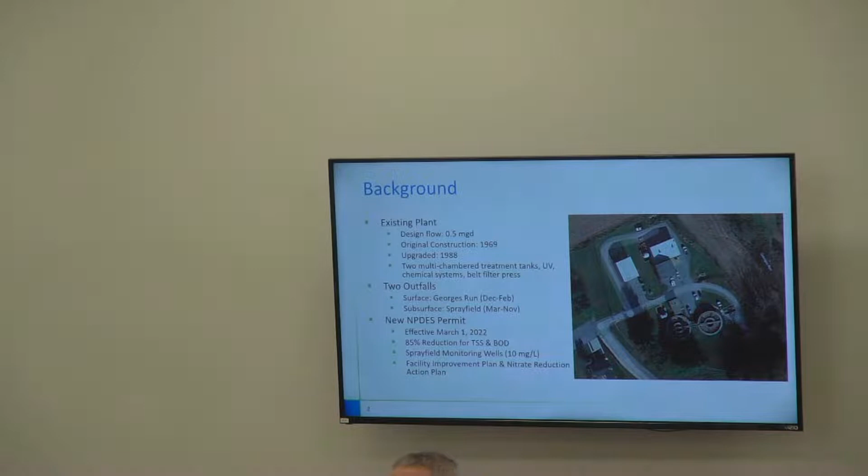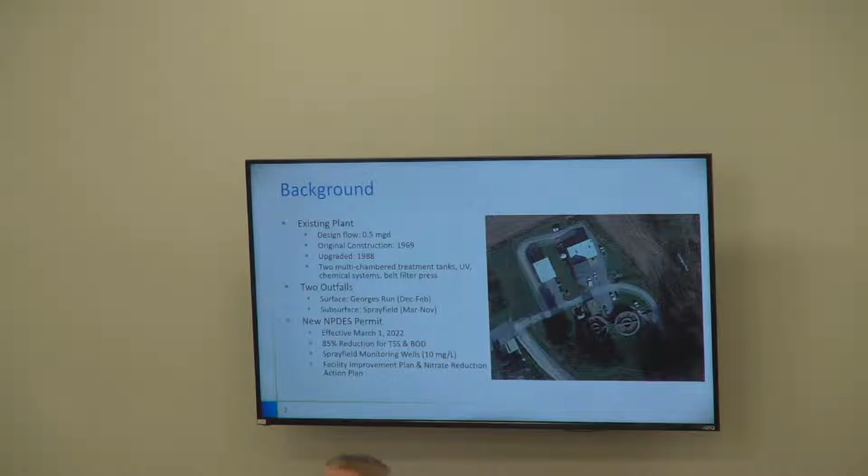As the mayor alluded to, there's two outfalls. There's the surface water discharge in the winter to George's Run, which is adjacent to the plant, and then the rest of the year you have your subsurface discharge with the spray field, from March to November generally. That adds an interesting wrinkle into this evaluation. Those dual discharges are a unique feature of the plant here, and it gives you some flexibility that we had to take into account.

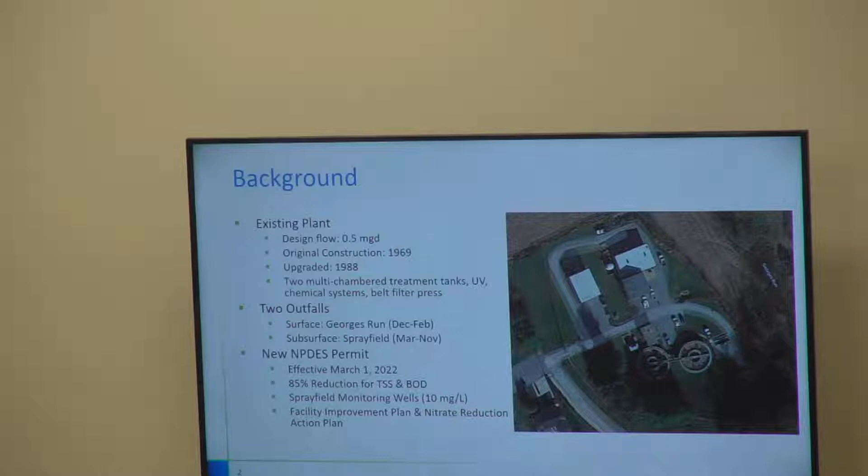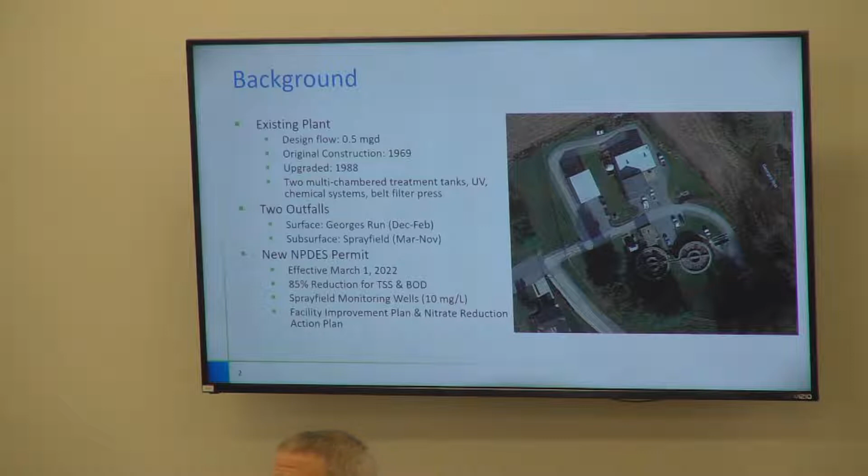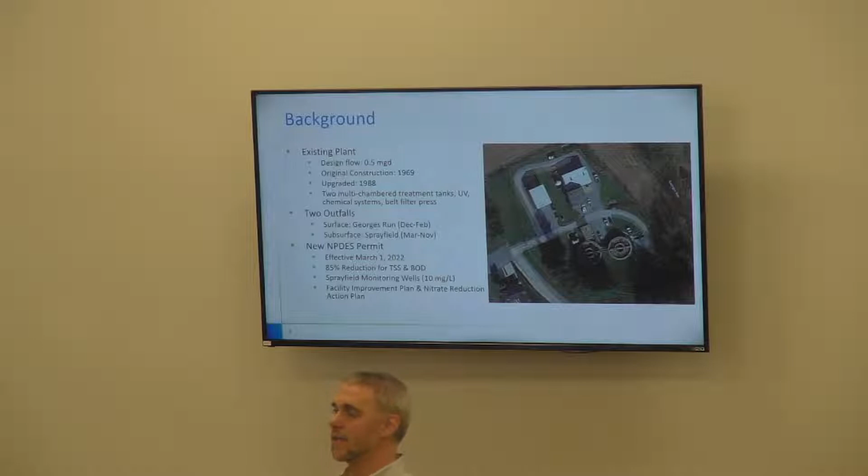There recently has been a new NPDES - that's the National Pollutant Discharge Elimination System - permit. It's an EPA permit that's also issued through MDE, and the new permit was effective March 1st. Not a whole lot changed. One thing that was interesting that's across the board, all of the new NPDES permits have an 85% reduction rate that they're implementing for total suspended solids, that's TSS, and biological oxygen demand. So really for a typical waste, that doesn't really lower the limit - it's just now you kind of can't take credit for having a weaker strength coming in. You still have to meet the 85%.

It still has the 10 milligram per liter nitrate requirement on the spray field, for downstream monitoring wells to make sure that there's not too much nitrates going into the groundwater from the spray field system. Two additions in that permit: one is a facilities improvement plan that's required, and that essentially comes out of some plant upsets that happened over the previous permit limit. The state is just looking for a plan on how the town plans to address those. And then there's also the nitrate reduction action plan, related to the spray field site and those downstream wells. They've found that some wells are increasing in nitrate level and they want the town to develop a plan to implement in the event they continue to increase, and how you're going to handle that. So those are the highlights of that new permit.

The study that we were hired by the town to do was funded through the state's Bay Restoration Fund. It included a condition assessment of what's at the plant now.

So we worked with your team and went through the whole plant to figure out how much life is left, what parts or equipment is failing or near the end of its life, what needs to be upgraded. It also included an expansion evaluation that I'll touch on a little bit. The bulk of it was the alternatives evaluation, and as part of that, we looked at 4 different alternatives, and I'll get into those details.

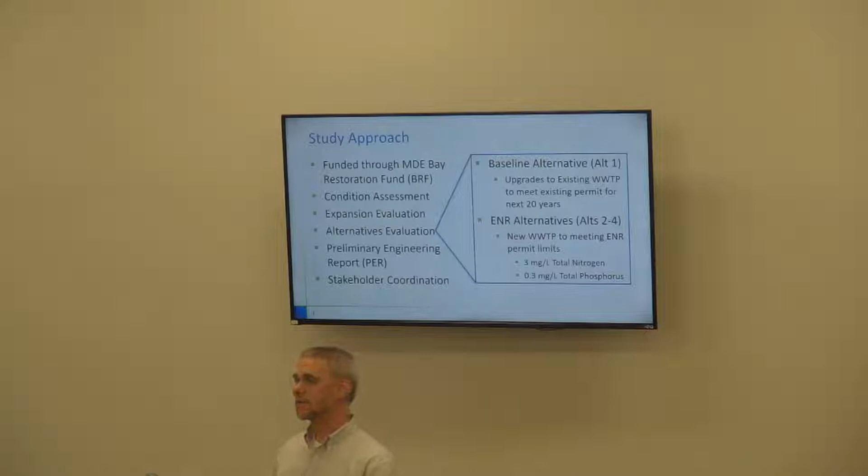So it's, again, a proactive approach by the town, to be commended for seeing that grant opportunity to study your plant and see what's best for the town's long-term needs.

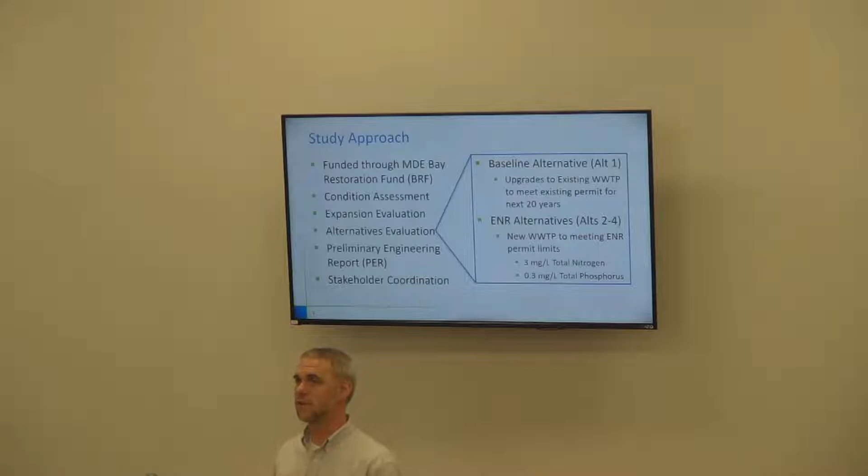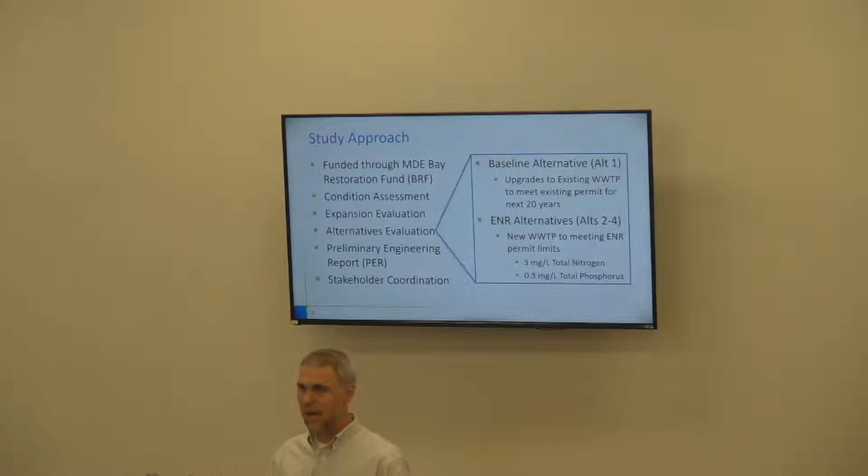All that was summarized in a preliminary engineering report that Rodney mentioned. It was submitted to MDE in draft a few months ago, as well as to the town. We got comments back, we revised it, and it was issued again in March. So we're waiting at this point for that feedback from the state. I checked in with their engineer earlier today, and he's still in the middle of his review. Throughout that whole time, we worked with the state, the Department of Public Works, the operators, and finance, Steve, to get all their input to make the right decisions.

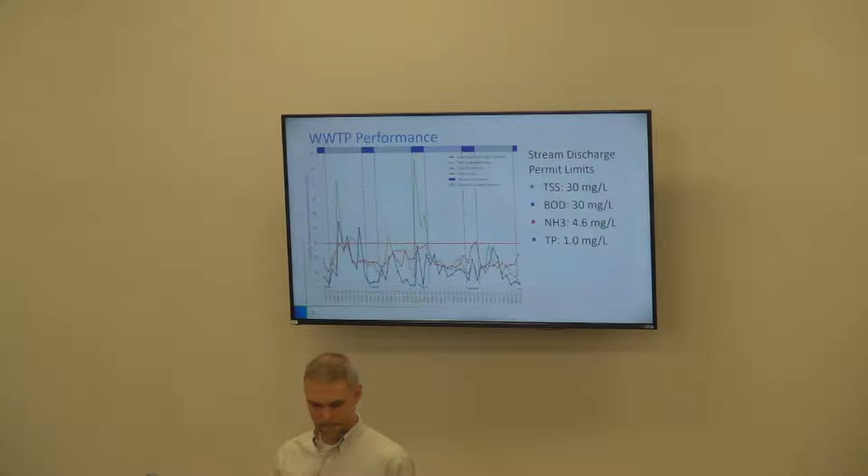Real quick here, the plant upsets that I referred to - this is key effluent data from the plant over the last 3 or 4 years. Those narrow bands you see between the blue dotted vertical lines are the periods when you're in a stream discharge, and that's when you have to meet a higher level of treatment. Where you see those green lines spike up, those are the plant upsets that are especially problematic in the stream discharge period, when requirements are stringent and you don't have that spray field to smooth it all out.

So that's what dictated the facility improvement plan requirement.

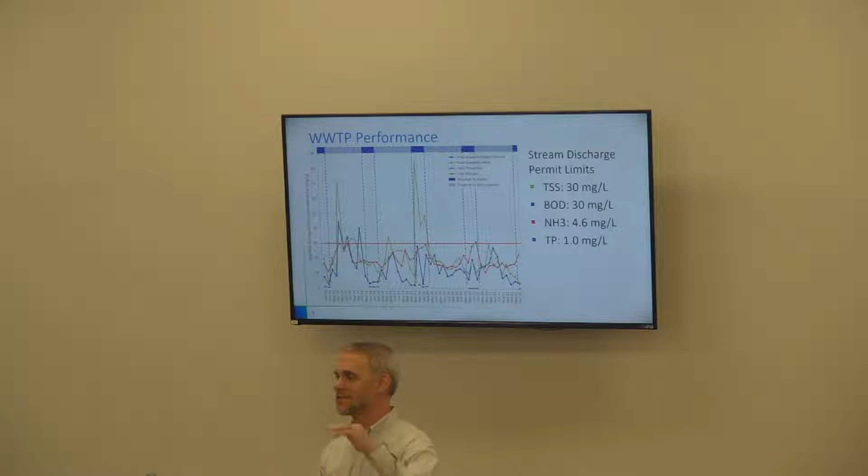And I guess I should have said this earlier, but if anybody has any questions as we're going along, please interrupt me. Otherwise, we can ask questions at the end, either way.

Real quick on the condition assessment - don't want to get into a whole lot of detail, but these were some of the major findings of improvements that would be necessary for the plant to continue to meet permit, even if you weren't going to go ahead with that ENR, enhanced nutrient removal upgrade.

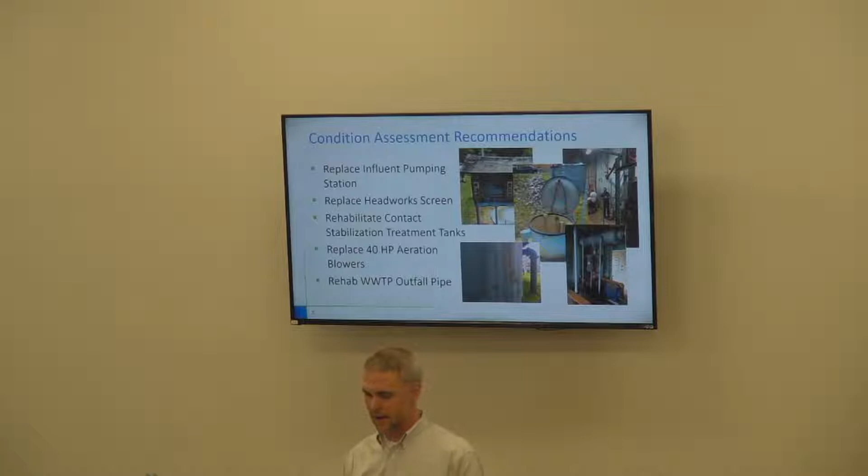So we found that the influent pumping station was in need of replacement. This is a portion where the pumps are located down in there. Here are the controls back here, pretty antiquated, in need of replacement.

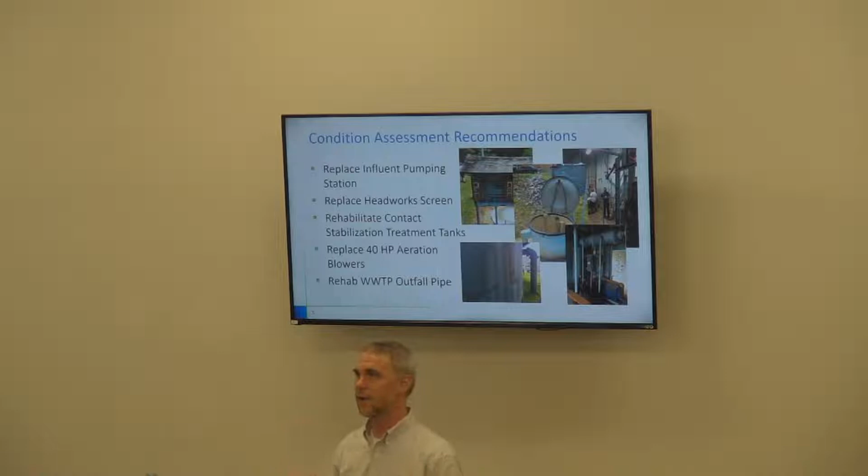The headworks - this is a picture from down in the lower level of the headworks where the screen is. There's some confined space entry concerns. The screen is down there, and it has to be hauled out manually. So we recommended some improvements there.

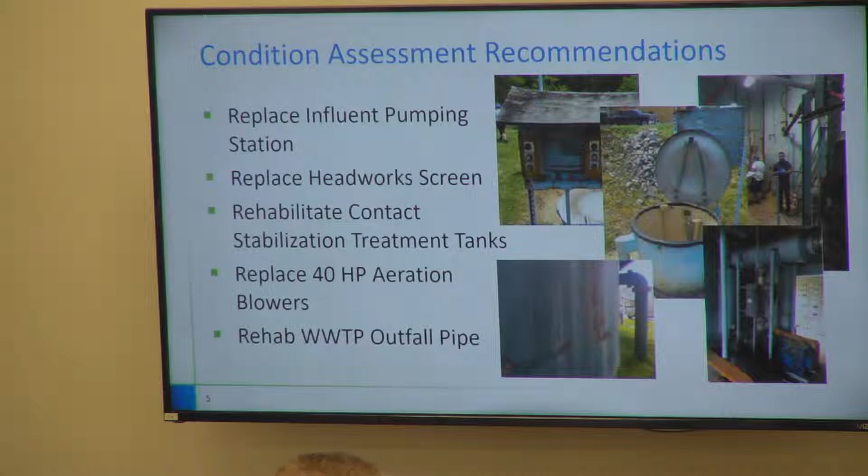This picture down here in the bottom left is of those circular steel tanks. There's corrosion, so we were recommending rehabilitation of those tanks. And then the blowers are pretty aged as well, that's the picture on the lower right - just an example of some of the more major process improvements that we would recommend.

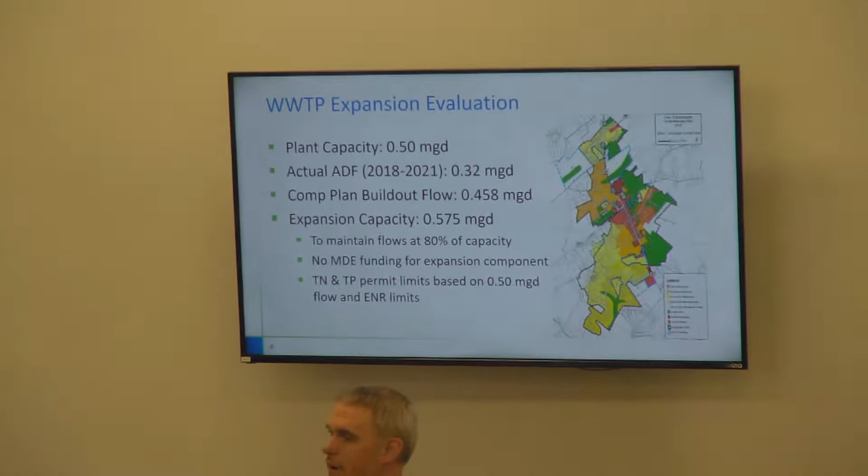On the expansion, that was a key component, right in the name of the project, was an upgrade and expansion evaluation. So we looked at the expansion, and as I said in the beginning, your plant capacity is at 500,000 gallons per day. We looked at the flows over the past 4 years, and they averaged 0.32 million gallons a day, so quite a bit under the capacity of your plant.

We then looked at the comp plan and computed, based on the full build-out in your most recent comp plan, what the flows would be. That's where we came up with the value - we'd add that to your base flow of 0.32, and it projects to a flow of 0.458, so still underneath the current plant capacity.

Because there was an expansion component worked into the project, we came up with the idea of expansion based around a flow of 0.575. What that does is keep your build-out flow to less than 80% of the plant capacity.

It's not something that's recommended. You really don't want to be building all that extra capacity into your plant. It's more expensive and can be more difficult to operate. Also, the state isn't going to fund the expansion component, and your permits as far as nutrients are still going to be based on your current allocation. So if you end up having to treat to a higher level if you accept more flow, for that reason we're recommending sticking with the current plant capacity of 500,000 gallons per day.

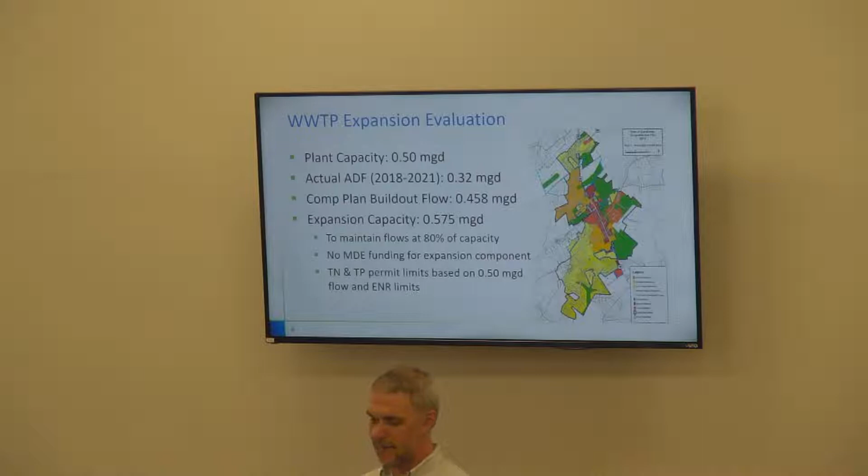And pretty much everything I'll present here on after is all based on that level.

It's ENR removal, so the benefits of having that nutrient removal, constructability, plant resilience—how resilient is it to power outages or chemical shortages or things like that—ease of operations, where we talked to the operations staff and looked through the different processes to figure out what they felt comfortable with and what provided the simplest means of operating. We also had sustainability considerations, and footprint.

We looked at how the different processes and all the different alternatives fit on the existing plant site.

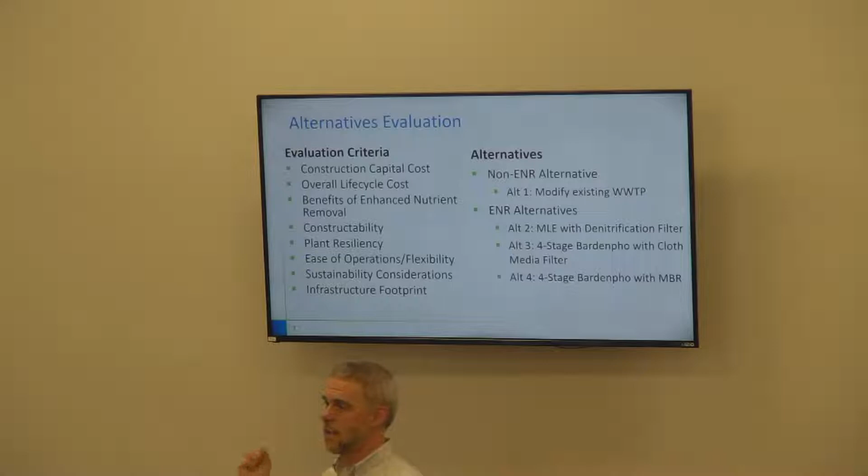The last one, alternative 4, is that same 4-stage system but with an MBR, a membrane bioreactor, on the end. That's basically lots of small tube membranes with a very small pore size, where the wastewater at the end is pulled through those membranes, which again filters out all the particles that have the phosphorus nutrients in them.

For life cycle, we took the same approach, but looking at operational and maintenance costs of those systems. Again, alternative one scored the highest, so we gave it the highest maximum points. That's pretty simple because it's a simpler system—it doesn't cost as much money to operate, and there aren't as many parts, pieces, chemicals and things to keep it going. The scores for 2, 3, and 4 were all ratioed based on that cost.

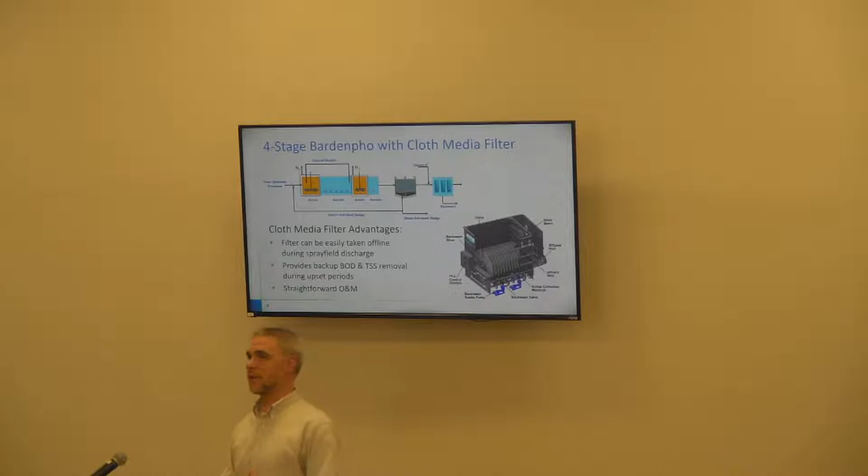So this is a little more detail about alternative 3. You can see that 4-stage tank. It's got anoxic zones, which have no oxygen being added to the wastewater, and aerobic zones, which is kind of what you already do. That 4-stage process is what drives the biological nutrient removal.

At the very end, that last blue tank on the right is the cloth media filter, which filters out the fine phosphorus particles. On the bottom is a blow-up of what that cloth media filter looks like. Those individual discs have the cloth media in them. The wastewater is pulled through those filters and leaves on the right side of the figure—that's where the phosphorus is driven out.

So a couple of key advantages there: that system can be turned off pretty easily. There's bypass piping around it—close a couple valves, open another valve, and the system's bypassed. You could consider doing that in the season when you're not stream discharging, pretty simply. Not a whole lot to it. It provides some backup in case you have upsets for more traditional pollutant removal, and again, it's pretty straightforward to operate.

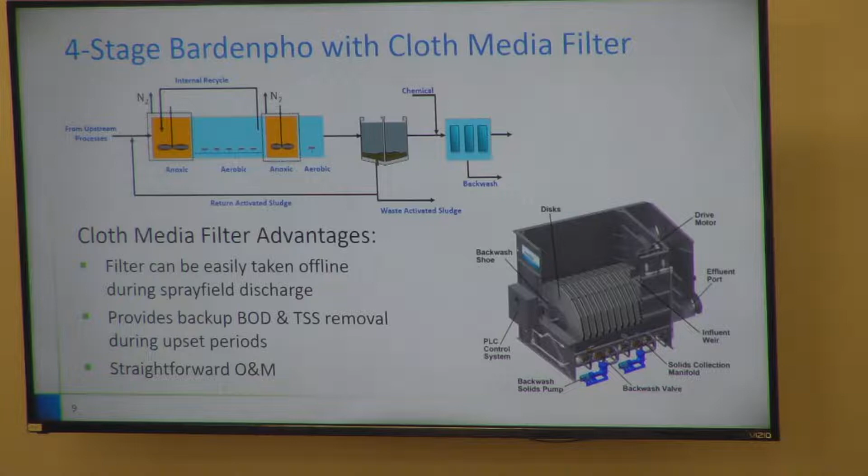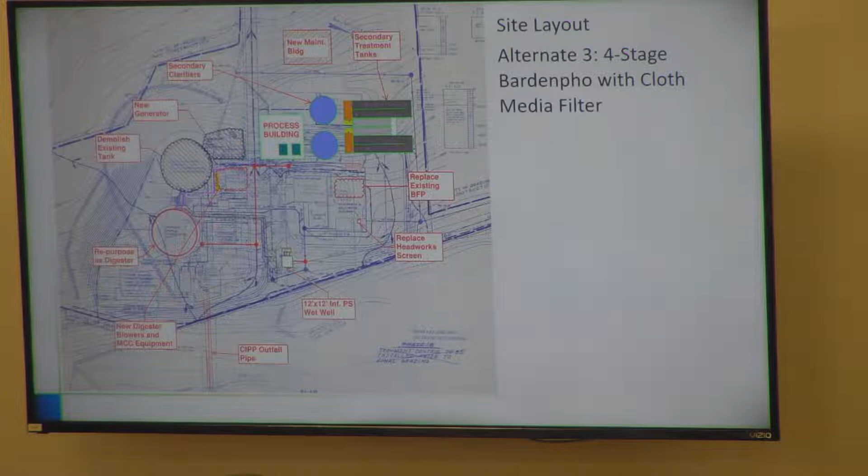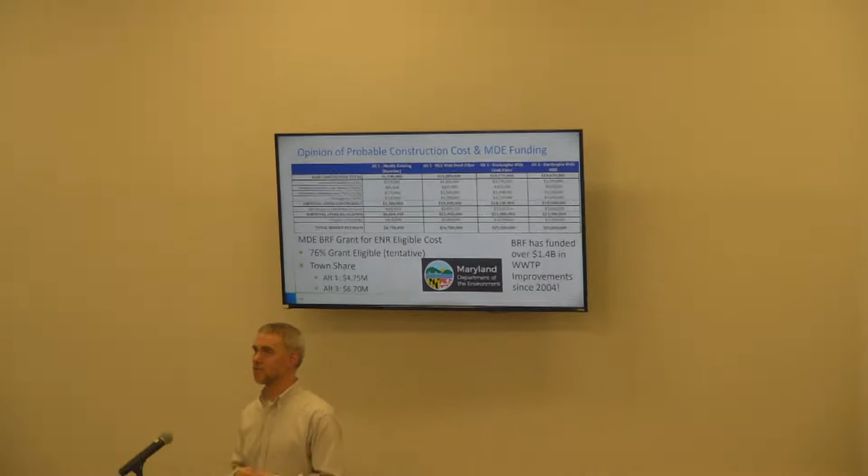But there's components of this project that aren't, like your belt filter press is in need of replacement. They don't generally pay for that type of thing. So we went item by item and figured out what would be eligible, what wouldn't be, what would be partially eligible. We came up with a tentative percentage of 76% grant eligible. That's very tentative, something that will be worked on with the state all the way until the bids are opened and construction starts.

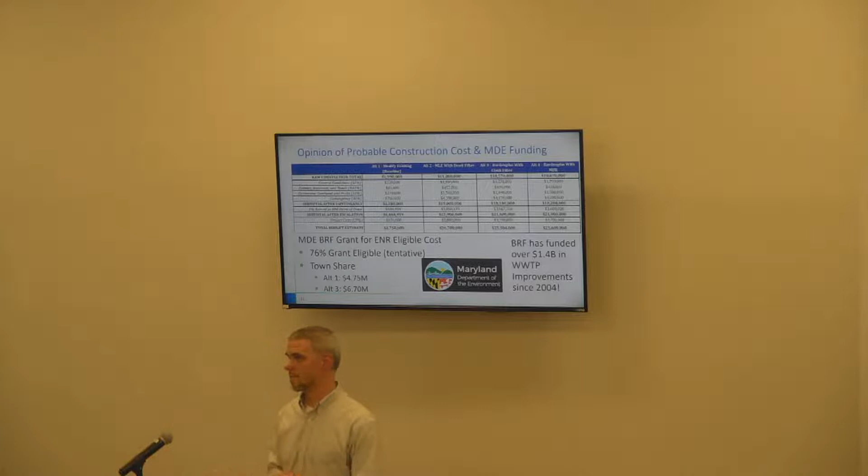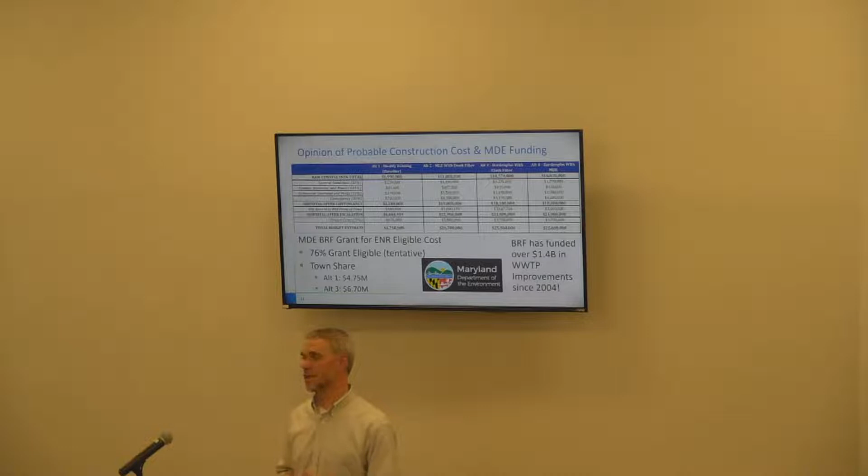But at 76%, if you take alternative 3, which is our recommended alternative, the town share is $6.7 million. So if you want to think of it from the town share component, the numbers to compare would be the 4.75 for alternative 1 and the 6.7 million for alternative 3, which is the recommended ENR alternative.

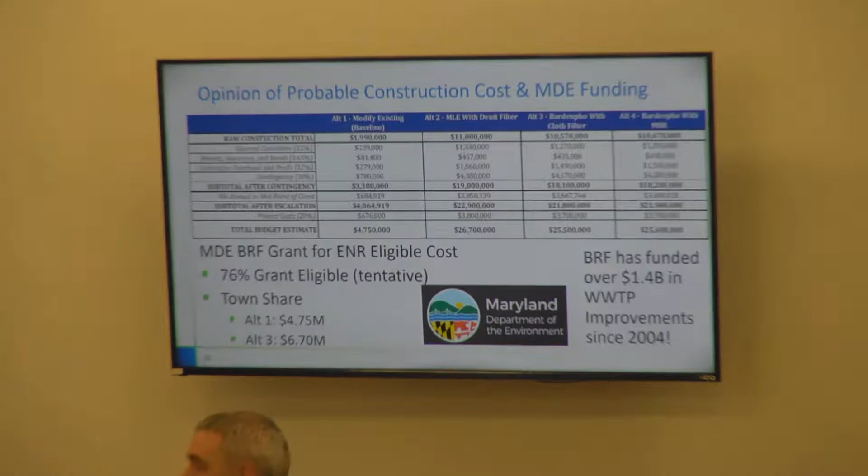Is that 76% a conservative estimate? It is, although just this afternoon I got an email from the state reviewer commenting that on the belt filter press we had used a 20% share, and he noted that based on how we calculate the solids generation going to that belt filter press, it might not be funded to that degree. So that particular item could go down a little, but overall that's a pretty small piece of the project, so maybe it falls to 75%.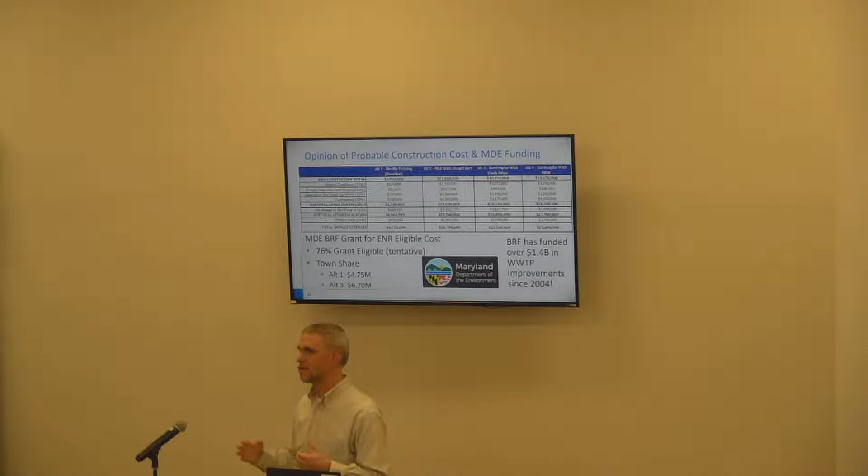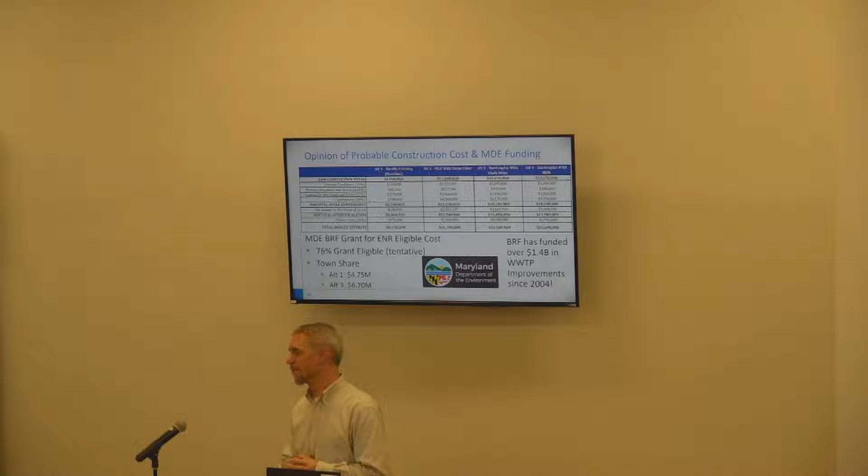So, yeah, we tried to be realistic. But overall, we have that 30% contingency and the 20% project costs are large, as well as the escalation to midpoint, all these layers of contingency that we've built in.

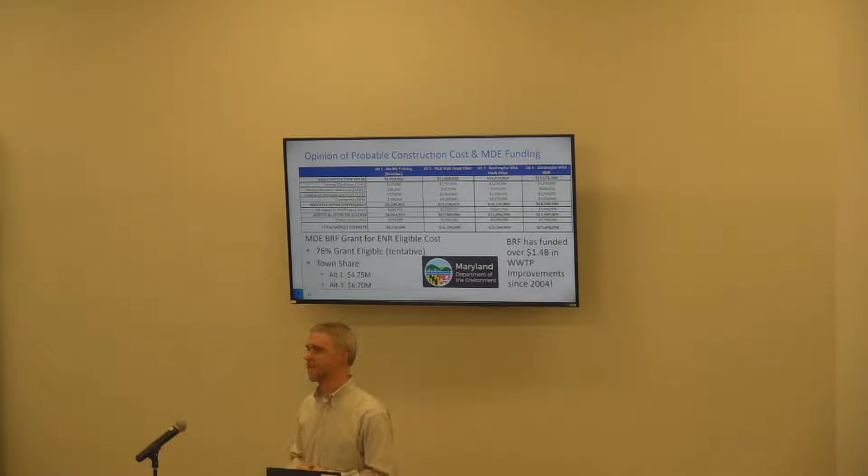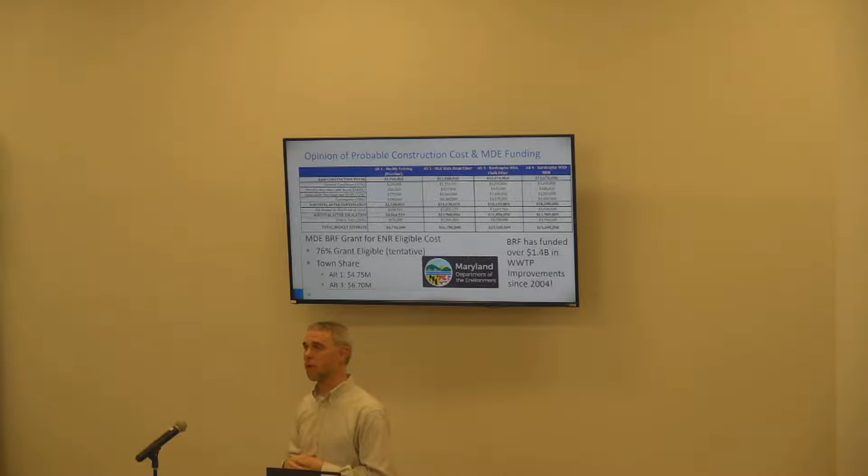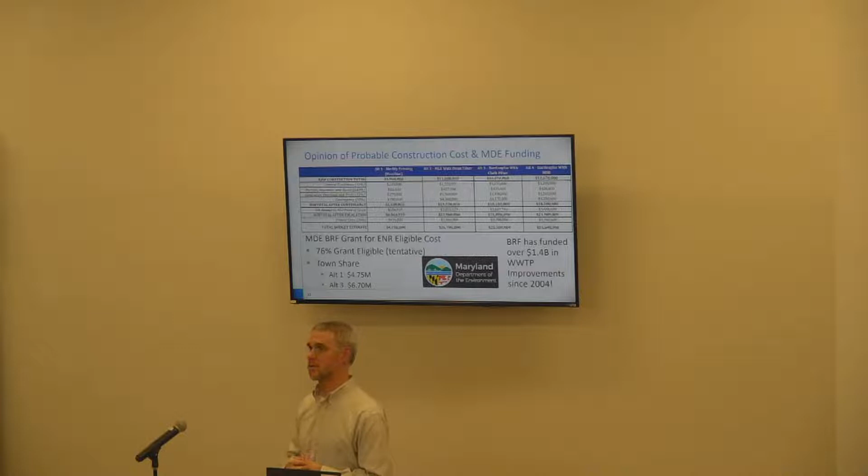So you can see the state really is funding a large portion of that. I looked it up, and in their current report, the Bay Restoration Fund has funded over $1.4 billion in plant improvements since 2004 across the state. I thought that was an interesting number. They focused on the large plants first, and now they're getting down to the more minor plants.

May I ask a question? In any of these options or alternatives, is there going to be a lag, or will we be able to continue providing the service we're providing now? Or will we have a breakdown at any point in the process where we're stuck, not able to provide services to the level we're at now, if we were to choose any of these options? Good question. Two thoughts come to mind, one that I skipped over in this slide.

The fourth item down, constructability, and the term everyone always asks about, MOPO, maintenance of plant operations, which is exactly what you're talking about. The scoring we gave there speaks to the difficulty of alternative one. If you're just going to upgrade the plant you have, it's difficult, so that's why that one was scored low. The other options, where you can build your new plant over here and keep your existing one running, score higher, though obviously it's not that simple.

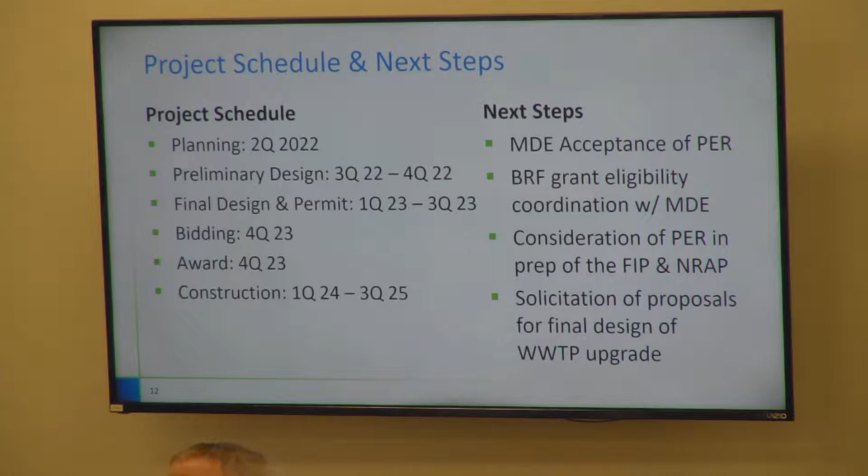Next steps: MDE is currently reviewing that PER, or preliminary engineering report. So I'd expect to hear back from them within a week or two with any final edits we need to make.

I know there's a town certification process, so there's going to be at least a few small revisions. We'll see what other comments they have. And then there's that grant eligibility coordination, working with the state to see what that percentage is - is it 76? 77? 74? And what timelines you might be working under. That kind of coordination would happen.

This last point here is an important one as well. I mentioned at the beginning the facility improvement plan and the nitrate reduction action plan. If you move ahead with this project, both of those plans become moot to some degree. With a whole new plant, they're not really worried about interim improvements to make this plant function, since you're taking all the nitrogen out before it even goes up to the spray field.

So your nitrate reduction plan becomes pretty simple - we're taking all the nitrate out down here at the plant, so there's really nothing to do up at the spray field. Those plans become greatly simplified if you decide to proceed with an ENR solution.

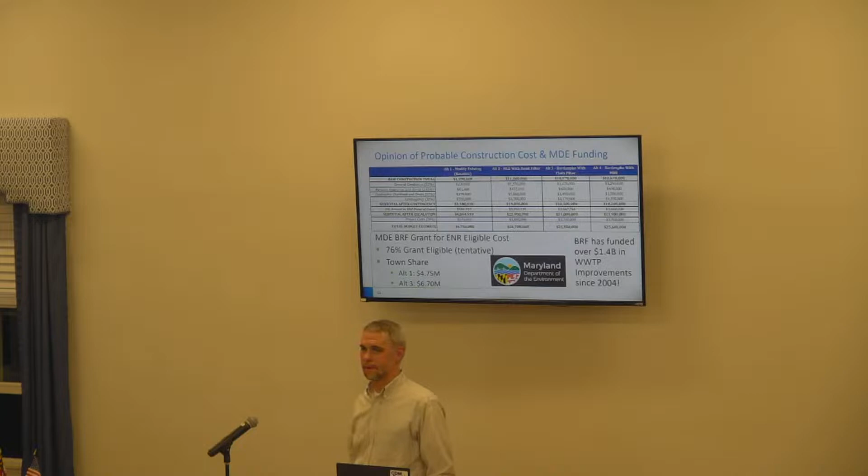And to date those funds have funded projects elsewhere, all the larger plants that you referred those to. That is correct, yes. Yep, that sounds about right.

So one other clarifying question. Keeping in mind that our original system is over 50 years old, and we upgraded 34 years ago. We got about 20 years on the original before we had to add on. Then you said if we went with option 1, it would get us through the next 20 years of permits, meet existing permit for the next 20 years. What could we anticipate option 3 getting us? If we fix what we have, is it going to buy us that 20 years and then we're down the road having to do another process like this? Or would we be able to maintain a different option for a longer time? Do we have an idea of what we would anticipate it to work for?

A lot of times for these types of improvements, the design life of something, the generic answer is to say it's 20 years. But in reality, as you learn from your existing plant, if someone was standing here 50 years ago saying you've got to build this plant, they would have told you it had a lifetime of 20 years. Well, here you are 55 years later and you're still using it. So the design lifetime often for these things is stated as 20 years, but you would expect it to last longer. Really the plant upgrade 2 through 4 is all about meeting the lower limit, as well as providing something new, where option 1 just eliminates the issues that have been causing the plant upsets, and you have more potential for major things like corrosion on the tanks. So, yeah, 20 years, but it should last longer than that.